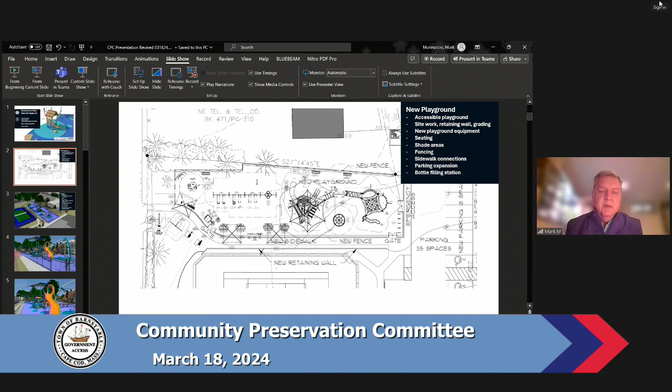So right now, this is under the advisory group review. They're selecting colors and tweaking some of the pour-in-place. There's talk about maybe putting like hopscotch in the pour-in-place and some other elements with the surfacing. Let's talk about using these benches here, actually having some tables and sitting areas that have maybe chessboards or checkerboards or some type of play on the surface.

And of course, benches. So some of this is still being adjusted and modified, but this is the basic theme that they felt was appropriate for Osterville. The Oyster Shack. Scavenger hunt - this may change to something else, some other theme.

And then this is the master plan for the next phase, which would include this kind of accessible comfort station, the tennis, street hockey court, and then some expanded parking off of level road. And of course, completing the planting. We've already started some planting along First Ave, but we finished some of the trees and the planting there. So this is all under design and discussion, but you may see some of this come forward in the future for a request.

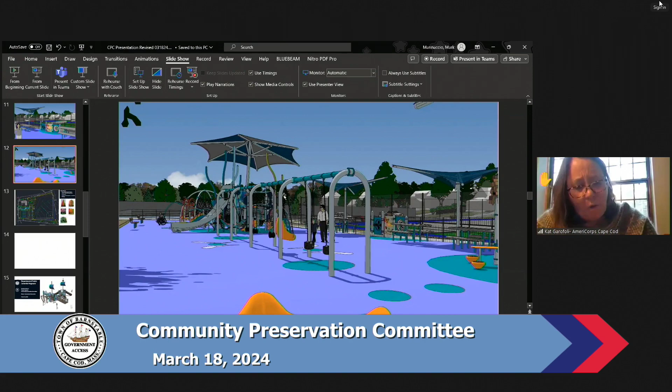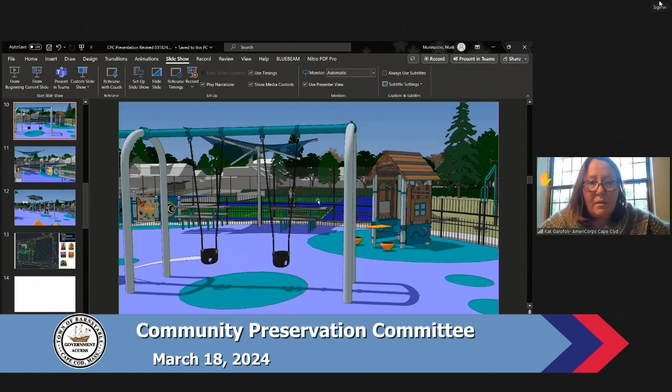For the structures, especially the ones with visuals that kids can engage in, I've seen at a variety of playgrounds that the sun can fade out some of those features over time. Do you have any idea if the town will have reserve funds to replace equipment over time? I know newly installed equipment should have a pretty good shelf life, but at some point things will need to get replaced if they fade. Can you talk about the town's capacity to plan for that outside of community preservation?

Yeah, I'll use Luke's Love as an example. The maintenance there is basically under structures and grounds, and there's a user group that's very active in that playground. So if somebody from the town doesn't catch an issue during a safety inspection, but weeks later there's a problem with the surfacing or something, they're really good at notifying us. We then notify the playground manufacturer, and if it's in warranty, it gets repaired. If not, we end up paying for it to get replaced or repaired.

We had a problem with the surfacing last year underneath the swings, which tends to be the first place rubber surfacing wears out, as well as at the bottom of slides. They couldn't patch it right away, so we purchased some playground pads in coordination with Real Associates. They took a look, and determined what should go there, because the pour-in-place surface is weather dependent — you really can't pour it in cold weather. It has to be installed roughly May through September. Once the weather warmed up, they came and patched it, and you could hardly tell the difference between the old and new.

We do have safety inspections. Real Associates has been hired for safety inspections at a number of the playgrounds, and she's conducting those. As she goes along, worn parts get replaced, and that usually happens through structures and grounds. If it's a larger project where a piece of equipment actually has to be replaced, that would come to us, and we would seek funding through a capital program or something similar to replace a large piece of equipment costing $50,000 or more.

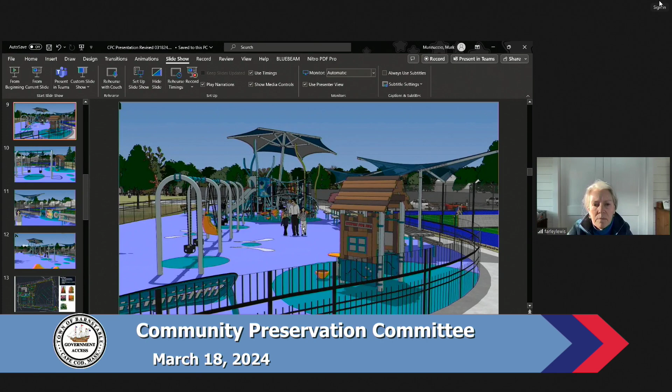Thank you. Anyone else? I had a couple questions, Mark. Sure. Has the community center come down yet, or?

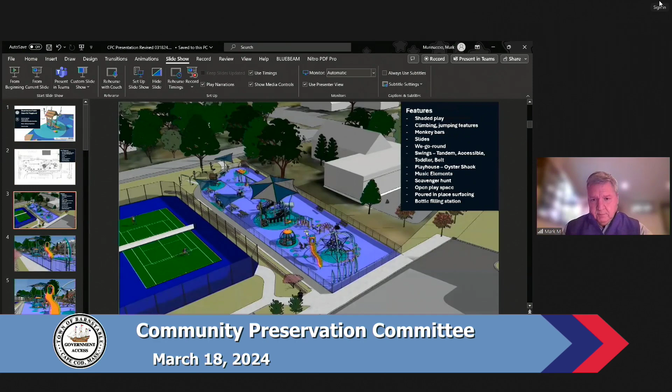Yep, let me show you the site plan. It's on this site plan here. I see this ghost image right now — yes, that's been demolished. All the hazardous materials have been trucked away. The debris is there, and we now have a contractor who was required to have a surveyor come out. He's been contacted and is coming out to set these grades. The hill that went up against the buildings will eventually be removed so we can complete the outfield that was impacted by the corner of that building. These are the contours in the contract documents to be restored as part of the removal of that building. So the building's down, it's just dirt right now. We'll regrade, and then we'll be able to plant grass in a couple weeks.

That'll be part of a different phase, finishing the field. There's $22,000 left in the field project, so any funding we need to complete the field will come out of that, as well as finish the planting out there.

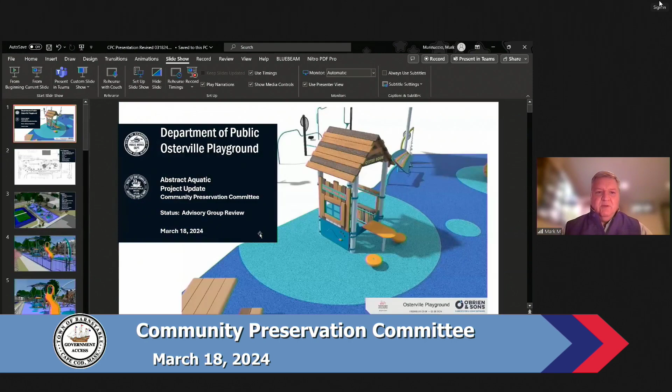And I assume the purple surface, that's not a final decision? No, this was part of what we called an abstract aquatic theme. You notice here it's kind of like a splash. So what's appropriate for Osterville? We went through a long list and a big presentation for actual themes — you could do a zoo theme, a Western theme — what's appropriate for Osterville? There are hundreds of different playground equipment themes. So really the initial one was this artistic abstract theme, and a number of committee group members wanted to push the waterfront theme. So Real Associates turned around in two weeks and put an aquatic flavor on this, and they're determining what's appropriate there now.

That's in group discussion. Last Thursday they met, and I think they're meeting again this week to discuss colors and surface colors and that type of thing. Okay, great.

And then the last thing I had, were these awnings and things seasonal? Will they be taken up and down every year? They're seasonal, similar to what we have over at the pickleball courts - there's a shade structure there. These are fabric, they would come down in the fall and be put back up. And that would be programmed in through Structures and Grounds? Structures and grounds takes care of all of that. It's part of their spring work.

Okay, and I see there's no plantings around this, so it's too tight an area? No, there's discussion of plantings. When it was this aquatic theme, there was suggestions of putting like beach grass in certain areas and doing plantings, but we're not really there yet. We're still working with what type of play do you want in the space? What is that equipment? How does it work together? What should that overall theme be?

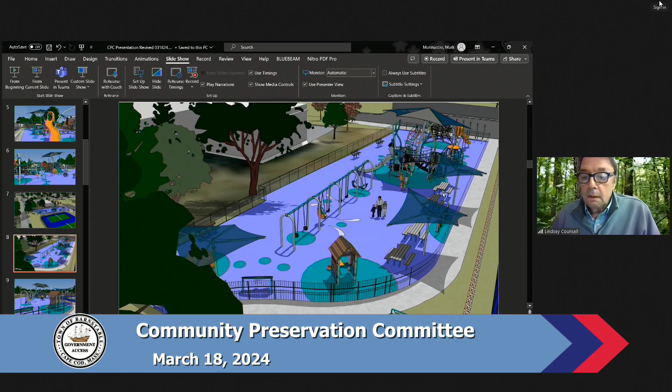Members, any other questions? Yes, go ahead Tom. Mark, and for this project, what kind of timeline are you looking at right now? You're just looking at different themes and color and that sort of thing?

Well, this is a working plan that was based off of discussions and suggestions with the steering group that was appointed by the town manager. I would like to wrap this up pretty quickly. I think they're talking about colors right now. We're not really, I don't think they're talking about changing equipment.

We have a lot of buy-in. I think if I took a vote today, they would agree on this playground, but I don't want to do that. I don't want to disenfranchise anybody. We want to have kind of a group agreement on this, and then we would take it to the community and get their feedback as far as play.

I have a video of this piece of equipment that's been put in other places with all the play. There's monkey bars in here, there's a jumping, kind of climbing rubber surface in there. There's a lot of amazing things to do - monkey bars underneath a walkway that's up above, and climbing. I don't have that for this presentation, but I could send that out to you guys so you could see it. It's actually a pretty amazing piece of equipment.

So it sounds like nothing is going into construction until probably next spring or something, right? It could be - I don't have a definite timeline only because we're at the beginning of this project and discussing it. If we solidify this week, I would probably be in construction documents inside of a month, and then those would probably take about 2 months, and we could be bidding this in the fall.

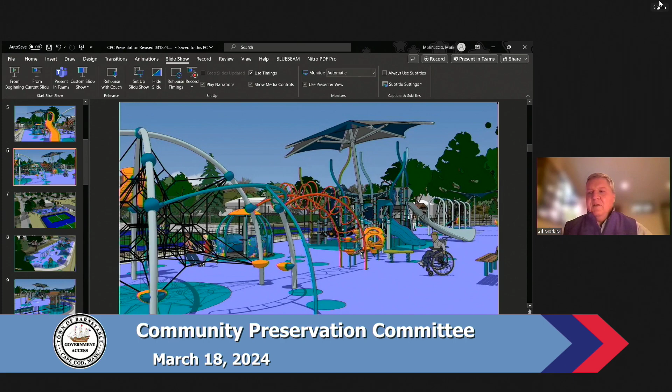Well, this playground equipment right now is at our budget of $350,000. And then we have a budget number for install, and a separate budget for surfacing. But because of the inflation and all this stuff right now, that's why I'm right now in the process of ordering the equipment for Centerville - because we have a guaranteed price through the month, and that's at legal right now for our contract in order for them to purchase that equipment.

Okay, which brings to the next project. Thank you.

So this is a presentation on the Centerville Playground. We're in construction documents right now. We've been meeting for about 1.5 years with the steering group for that project. They were looking for a nautical theme for the playground.

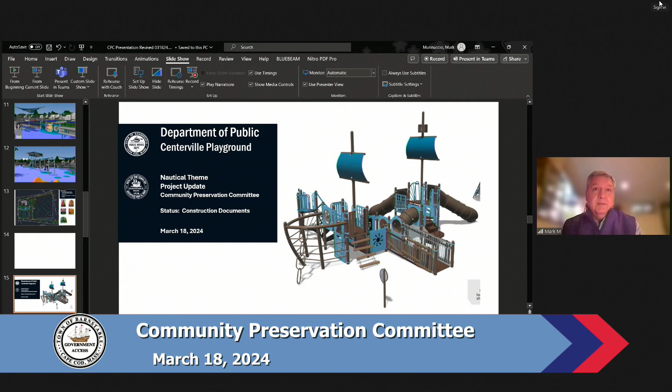There had been attempts to make a walkway here that didn't meet any code requirements and failed. There was not an efficient way other than putting in a handicapped ramp to get down into the space. So we put together a capital improvement plan and put out a request for redoing the playground and actually installing a parking lot at a lower elevation to ease the distance between the playground and your vehicle.

There was also at the time a field study being completed, and it had recommended that this field become a multi-purpose field. So we were going along with that field study as well as working with the rec department to solve this problem.

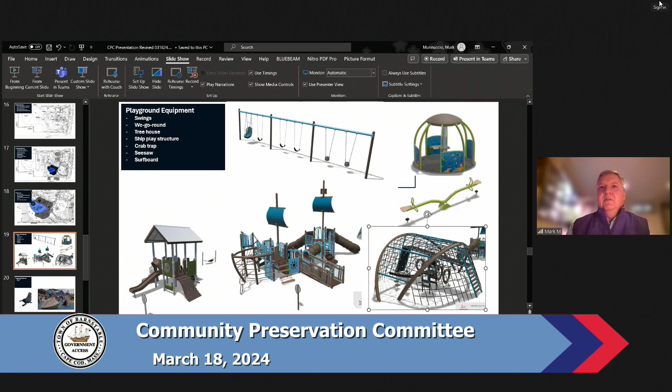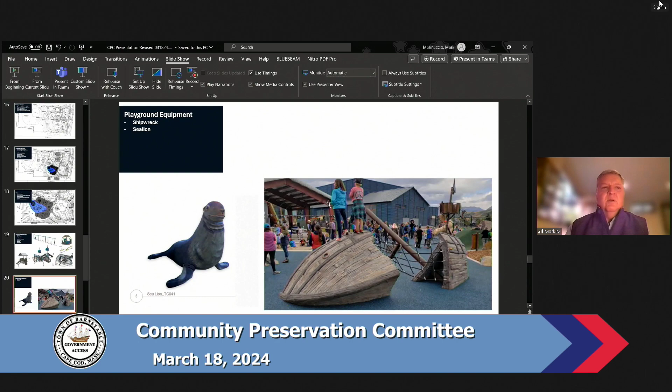And then right now there is the shipwreck and the sea lion, which are climbing structures. I don't have funding for these. It's about $63,000 for these 2 elements. I'm going to carry them as an alternate. If I can afford them, we'll buy them. If not, then they will not be included as part of the budget.

And I guess, are there any questions about that? Any questions, members?

I had one real quick one - so there won't be a need for a retaining wall on the street side? There's this existing slope here, and this traditionally has not had a guardrail on it. But we are looking to install a guardrail there. Of course, we would want that camouflaged with some type of picket fence or something, but that is being worked out. That really wasn't part of this project.

What happened is the playground's in here now, and we're sliding that playground away. One of the issues is we knew we wanted to bring fill in here, but the neighbor has a garage building with lower access. So we really can't raise the grade too much or we're affecting water flow onto our neighbor's property, which we can't do. So we can bring about 2 feet, 2.5 feet of fill in here. We've slid the playground kind of to the left on this plan, so we're further away from the road, but because of that, and this has been recognized as a concern about the steep slope, we're looking at a guardrail system at that point.

Do a wooden guardrail and then cover it with a picket fence? That was our initial thought. Really, we're working with engineering right now, because based on the size of the road, the speed, and the slope of protection, there's different types of guardrails that have to go there. So they're leaning right now towards one of those steel guardrails, because that can take a heavier load if there's an accident. But we're still working with it. This is a relatively new issue we're dealing with right now, which got wrapped up with the retaining wall failure and all that.

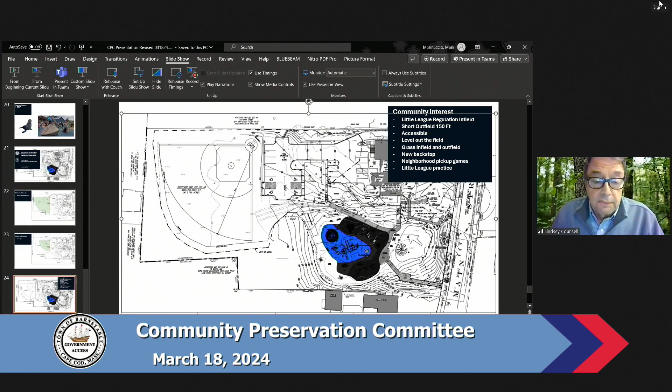And the other question, so you haven't finalized the planting plan in here? I know shade's a big deal.

Well, we have this, let me get back to the good slide. This sitting area with shade. There's trees, let's see this foliage here along here that is not being disturbed. So there is shade in the afternoon, shade in the morning.

But this was what we as a committee, as a group, actually steering group kind of has selected. So this is what it is. We have shade on there. So a lot of playgrounds don't have any shade, but we do have a shaded seating area there for people to get out and eat. And there will be a bottle filling station as part of this as well.

So I imagine you're going to have to put pretty extensive drainage under this. Yeah, this is the low part here. So this grading here is existing and this grade is lifted a foot. We're going to protect the existing tree. And this is the low part.

This is where we'll put a drainage structure in here. And this pitch is a foot across the playground to this point. So the water all flows in this direction. This will be the low point.

So will there be any opportunity to plant on the building side, all of this right walkway? Here, all this riprap, all these railroad ties, all rotted - it's all going to come out. Putting the slope, we're talking about doing right now a wildflower mix in here, so it really doesn't have to get maintained, and it would control any erosion and then in the summer it would be beautiful.

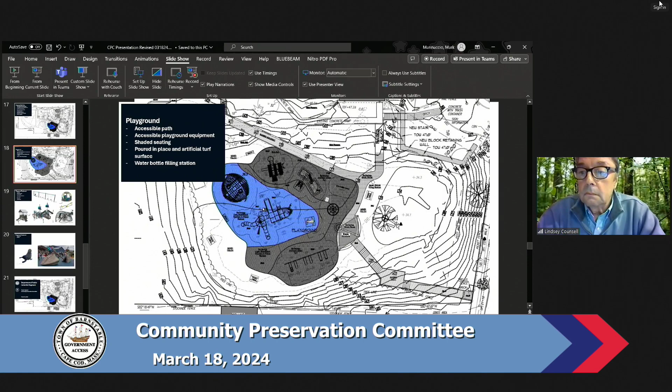Any other questions? Seeing none. Mark, any other updates on other projects you want to share with us? No, that was the only two.

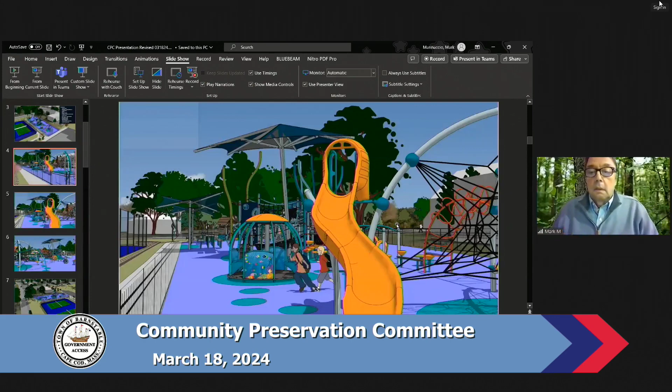We had a pre-bid meeting at the Paine Black House today, but we had no contractors show up, so we're going to be trying to drum up some interest for that project.

And how about the work on the Burgess House? That looks great over there, the new walk and everything. Yeah, we have some funding for window restorations, we started that project last year, and got into existing conditions there, but we had the flood at the Hyannis Golf Course that took a lot of our time and attention. So we have a new person starting April 1st, and we'll be getting back into that project.

We'll thank you, see you soon, Mark, I hope. Yep, thank you. Thanks, Mark.

All right, moving on in the agenda. We have no applications.

So we'll move on to correspondence. We did get a mailing from the local comprehensive plan group about the series of upcoming public village meetings on the current phase of the local comprehensive plan, which will include the existing sections we've done - natural resource, open space, as well as infrastructure. If you can make one of those meetings, we'd love to see you and get your comments in. It's a very important plan that'll help the town council set policy going forward. We'll be doing that for the entire month of April, and then we have other sections coming up, including housing, historic preservation and design - those will be the third phase, coming along in June, July, with another round of public meetings.